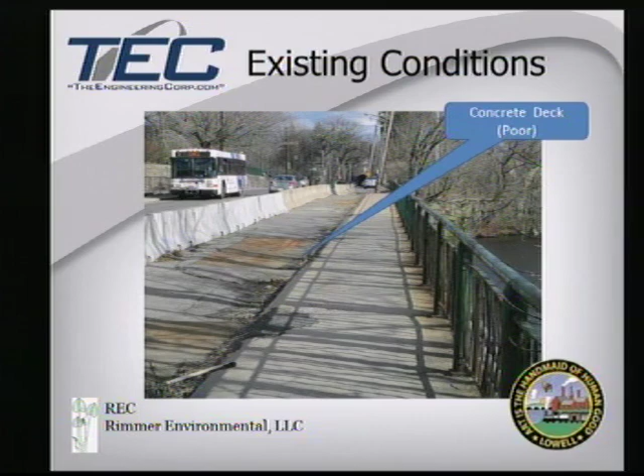Another thing to note: despite the poor condition of the deck, the existing concrete beams at this bridge are in good condition. You may remember we were here back in November to request to do some material testing to see if we could reuse those beams. We went through that, and the results exceeded our expectations - we are going to be able to reuse those beams.

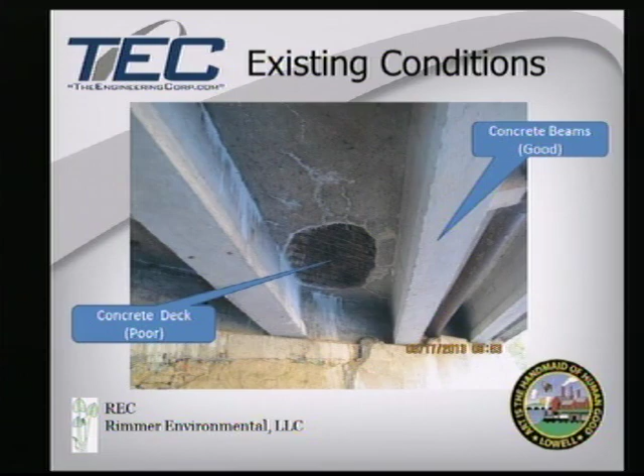Other areas that need attention and repair include some localized substructure repair, concrete spalling at the abutments - at the east abutment and the fifth pier, the easternmost pier along the river - there is some localized undermining and scour that we will also look to address.

We had another subconsultant, Novus Engineering, perform a hydraulic study to determine and evaluate the existing conditions, to determine the appropriate remediation techniques to address the undermining at the east abutment and pier number 5.

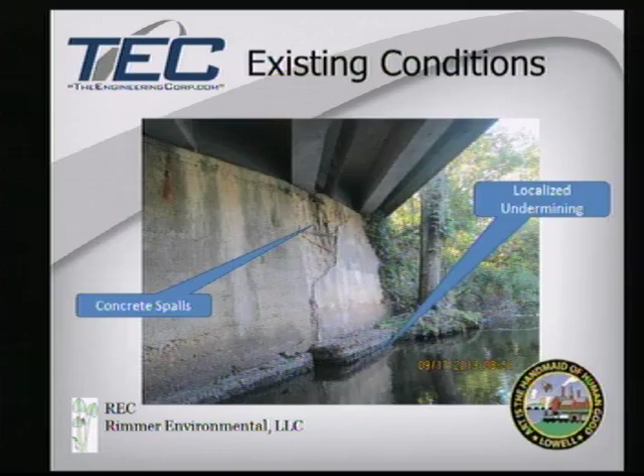So the proposed work - what we plan to do at this bridge - as I mentioned, we plan to keep the existing beams, so we're going to do a complete deck, sidewalk, and railing replacement. We are going to replace that in kind with a high-performance concrete deck, and we are going to replace the railings in kind.

This is adjacent to Lowell Cemetery and the Concord River Greenway, so we've been working with the historic board to get their buy-in and input on how they want to preserve the aesthetic of the Lucy Larcom ornamental rail on the outside. We propose to maintain that look and provide additional vehicular protection by installing an interior vehicular barrier at the face of curb. As mentioned, we would plan to reuse the existing concrete beams.

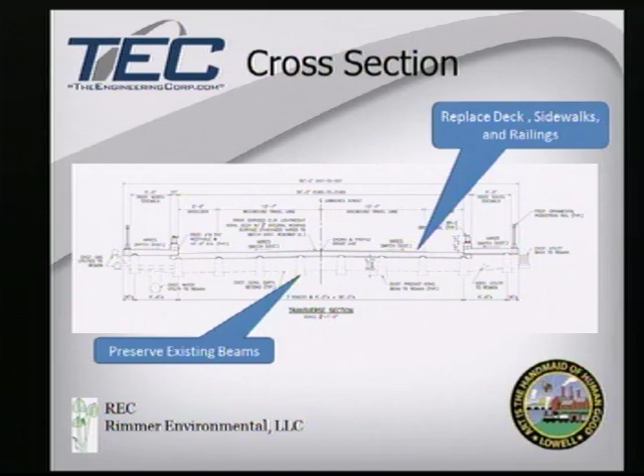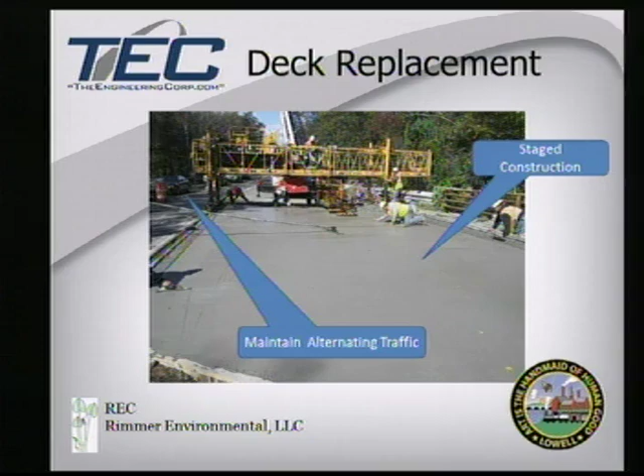The same philosophy is going to occur at this bridge, where we're going to maintain traffic in both directions through a single lane controlled by a temporary traffic signal. That was one of the wishes of the city - because of the location of the bridge and the traffic demand, we couldn't shut the bridge down and rebuild it all at once. We wanted to keep traffic going, so it's being built in phases.

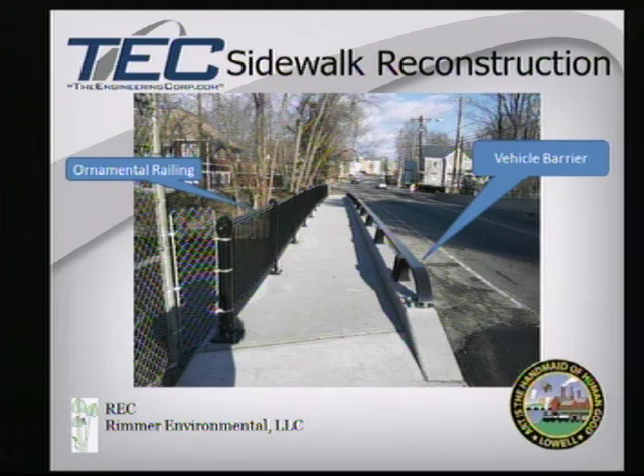This is a sample of a bridge we did in Lowell as well, to give you an appreciation of what we're talking about in terms of construction of an interior vehicular barrier, along with being able to maintain the ornamental rail at the exterior. This is Pawtucket Street over the Pawtucket Canal.

Can I interrupt you for a second? Can you go back a frame, please? If I know how - I can't, my eyes are bad. Does that say previous? There, thanks. Where the arrow points to, in the vehicle barrier - yes, this is not an issue for the Conservation Commission, but it's a design issue, yes.

These are being installed in various bridges throughout the city, and without fail, the plate at the ends where it bends down at the elbow extends out into the roadway surface, where they drill it into the barrier itself. There's a bevel on the concrete side, but the plate extends over the bevel. It's a potential liability issue, because someone could walk by and nick their leg on that sharp piece of metal - if you can pass that along to whomever. Sure. The Central Street Bridge they just did has a similar detail on both sides - four of them are like that.

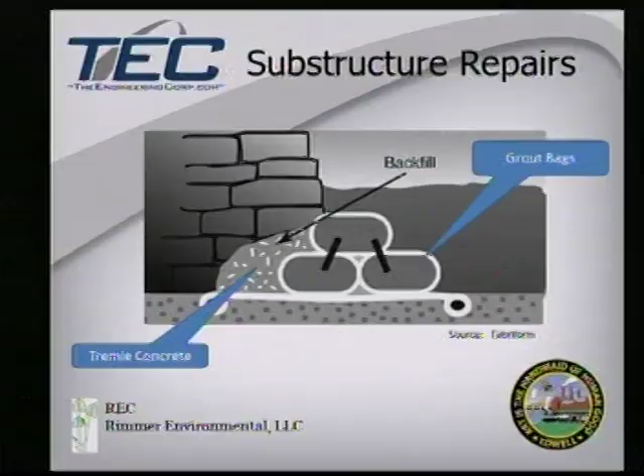This is a typical photo of what's being proposed to address the undermining at the east abutment and at Pier 5. This is a technique Federal Highway uses or promotes for all DOTs to implement for reestablishing substructure integrity. What you see here are grout bags, fabric bags filled with cementitious material that harden up and serve as a stay-in-place form. PVC pipes are inserted through those bags, and grout is pumped into the confined spaces, filling the voids of the undermined area. So this is what we're proposing to do, both at the east abutment and at Pier 5, and that's the extent of the underwater work happening at the bridge.

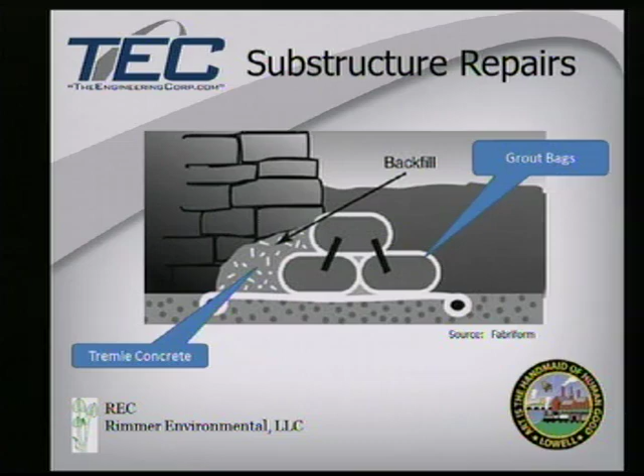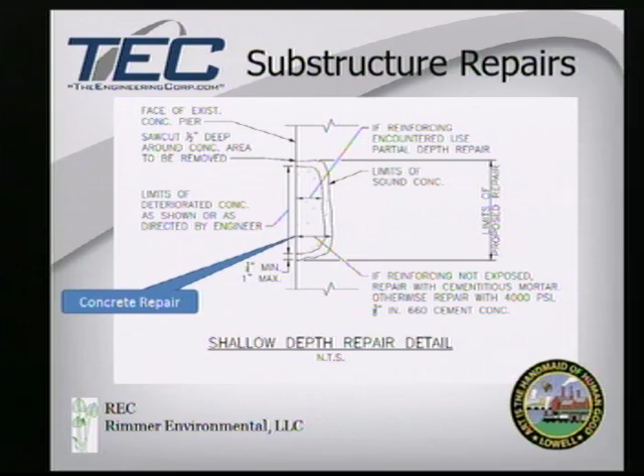Above that, all the other substructure work will follow another typical MassDOT detail for how you would ordinarily address shallow depth concrete spalls or masonry spalls seen at the bridge substructure.

I have a question. In order to get those bags in there, are you going to have to do some sort of cofferdam? Those are actually installed in the wet, usually with divers, to make sure they're properly installed underwater. It's all underwater work, constructed in the wet. So we're not proposing any cofferdam to construct in the dry for these instances.

Is there a certain amount of time those bags need to be in place before you can pour the concrete in? Yeah, you have to allow the grout in the bag to set up properly, and then you can form them to the contouring of the substrate so you get a good seal. So when you pump the tremie concrete into the voids behind it and underneath the abutment, you have a good solid retrofit.

So now to identify some of the resource area impacts from the proposed work: we have bank on the northeast quadrant of the bridge that we have to temporarily impact, and land underwater, as mentioned, for all the substructure work at the east abutment and Pier 5. This is bordering land subject to flooding. The bank at the northeast quadrant will also be used as temporary access for this substructure work, and riverfront area within the 25-foot zone for temporary construction access to get to the river to do the work beneath the bridge deck.

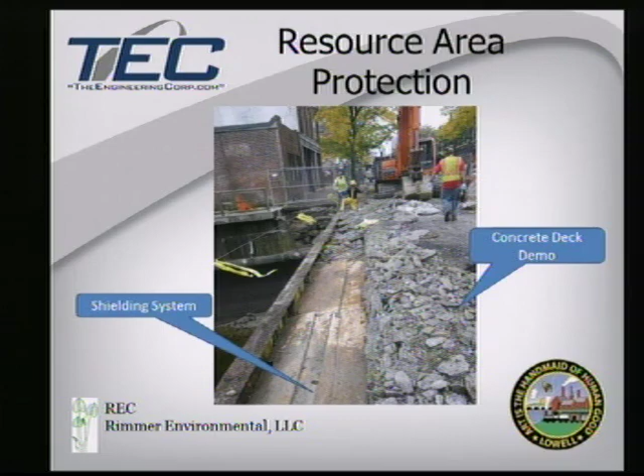Here's some means and methods for getting under the bridge and working under the bridge in the river with some work floats. You see the contractor has small 8x10 or 8x12 work floats that they can work from, and that can also serve as a protective barrier from any concrete or restoration work that's happening from dropping directly into the river.

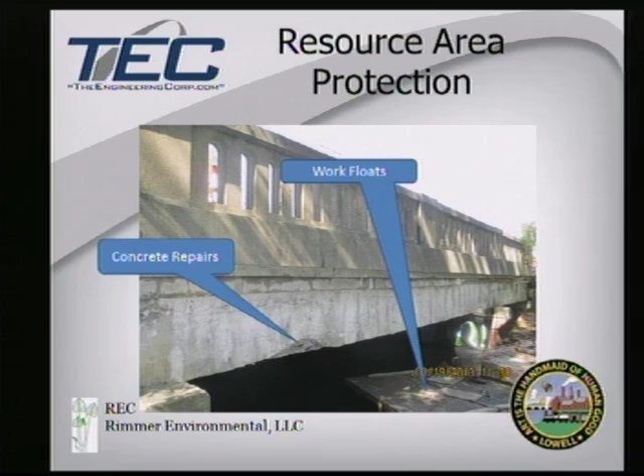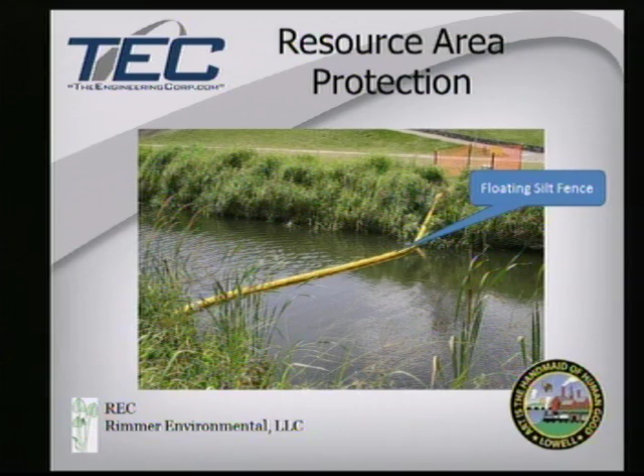So there are a few catch basins down gradient from the project at the intersection of Moore Street. So we would look to install silt sacks in those two locations.

In addition to this presentation, I just wanted to highlight that this is a limited project, a bridge rehab per the Wetlands Protection Act and the local ordinance. We did do a stormwater management report to demonstrate that the existing impervious area is remaining unchanged. Because of the limited project use, there isn't really an opportunity to do any additional BMPs for the project because we are local to the footprint of the bridge for the proposed work. But we did prepare a report per the Wetlands Protection Act and the standards, and it's included with this filing.

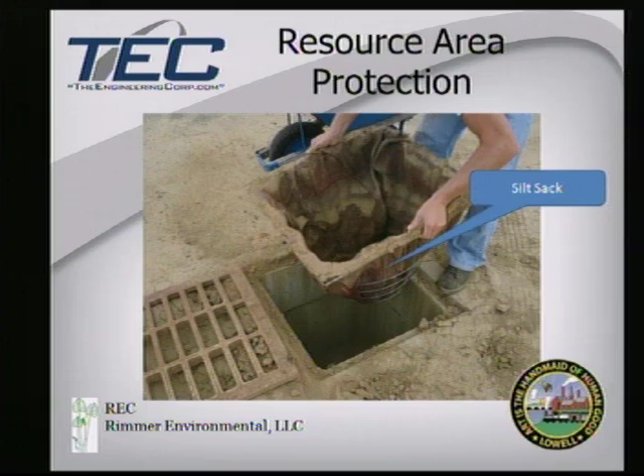So with that, if there's any questions, I'd be more than happy to answer, or anyone else from the design team. Yes, the grout bags, yes.

Do those remain after? Yes. After the grout has been pumped in, or the cement, or whatever it is that you do? They do, yes. And if I didn't mention it, the actual stream bed elevation is being reestablished, as there's been some loss of stream bed material. So those grout bags are there to serve as a permanent form for what we're correcting underneath the abutments, but it's not excessive fill.

My question is more geared towards, do they degrade? Do they solidify? Does anything leak out of them? No, my understanding of the product is once it solidifies it serves as another form of revetment or riprap. It's there to protect the toe of the abutment and prevent any future washout or future undermining.

Now my other two questions are more related to the resource area, your access area, on the other side, both on the South Lowell side of the bridge. For the most part, you have two large caliper trees. Let me go back to that photo.

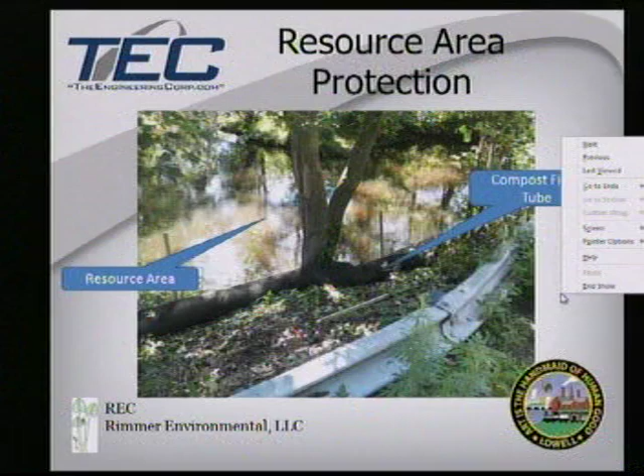Not that, that's a different spot. There, yeah. So this tree right here is one that we don't believe is going to be impacted by the work. The majority of the work is similar to when the contractors did the material sampling at the bridge—it's foot traffic, hand tools. The only thing is, if we were going to deploy the work float, it could be deployed from the road itself. Once we take the lane, we could drop the work float into the resource area. We don't envision large mechanical or heavy equipment going up and down that slope. For that reason, I think that tree can be maintained and preserved.

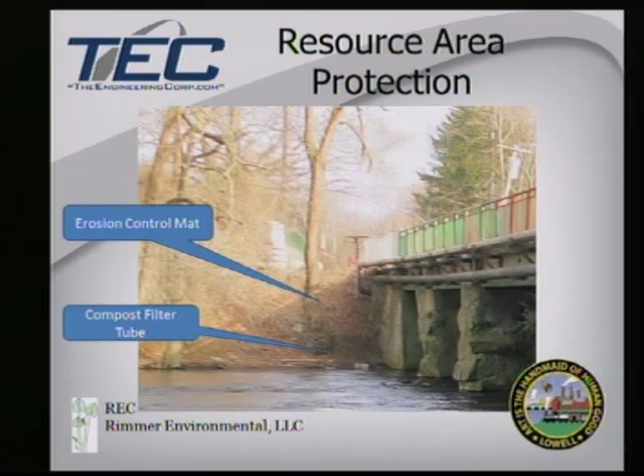That was my question. So you're not anticipating any heavy vehicle traffic that would damage root systems, since that tree is stabilizing that bank? Oh, it's probably absolutely protecting the abutments of the bridge too.

And now on the other side, where the abutments were sort of degraded—oh, let me. That side really isn't accessible. There's the vertical stone wall. You're not planning on impacting that? It would be on the lower right side, where it says handmaid of human good, the little seal there.

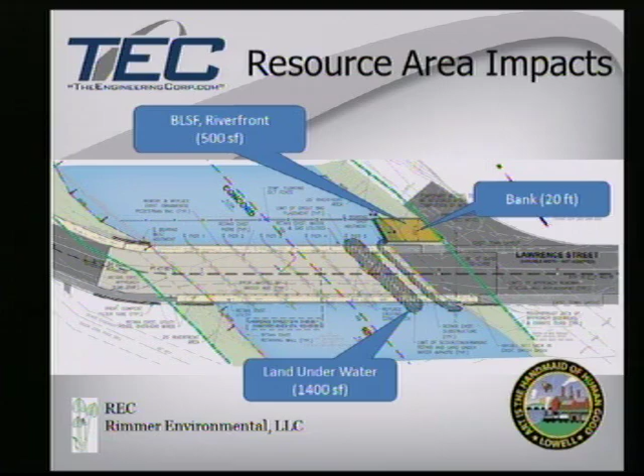That green area there, there's another very large caliper—I think it's a red maple. The only access area to get to the river is what's being shown, so that wouldn't be impacted either. No, okay. All right, what are the plans after that access area, once you're done, to restabilize that bank?

We would plan to use a restoration seed mix that MassDOT would ordinarily spec out for their state projects. This has to go through a MassDOT Chapter 85 review as part of this, so we tend to want to implement as much of the standard details and standard specifications, and any offerings that the commission would also have, as far as what that restoration mix would comprise of. We'd be very interested in doing that.

Mary's reminding me that, to protect that during construction, there would be a straw mat to help protect that from any large erosion or washout or what have you. All right, I have no further questions.

Commissioner Varnum? No, I have no questions.

Commissioner Lovely, just a quick one: how long do you expect it to take before those bags cure, and are you pretty confident that the scouring that's occurred in the past has been addressed and it won't happen again?

Yes, when we had our subconsultant do the hydraulic study, they gave us several alternatives, all of which would work. And this one is a proven practice; as long as it's properly installed and toed in, it prevents any future undermining from occurring.

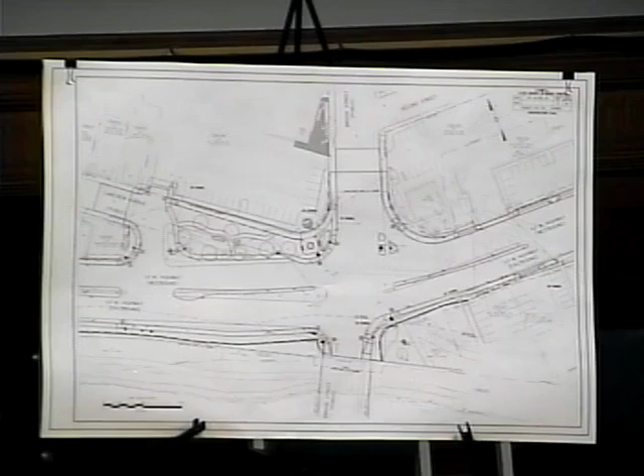I have brought, to address the items that were outlined on the comments that we received, a cross-section of the low point. There was a comment about the land subject to flooding. The low point at this location is approximately the intersection with Lakeview Ave, where the turn is, not where it comes up to the Bridge Street and VFW Highway. I'll point to it.

I have the profile that I can show you that, for the most part in this area, as you know, it's pretty densely developed. So we have to meet existing pretty much right at the back of sidewalk, because that's where the houses and businesses are. So the profile on the cross-section changes very little through here. It's mostly a reconfiguration of the islands, as you can see, and reconfiguration of the lanes and some minor widening, as well as the ADA upgrades.

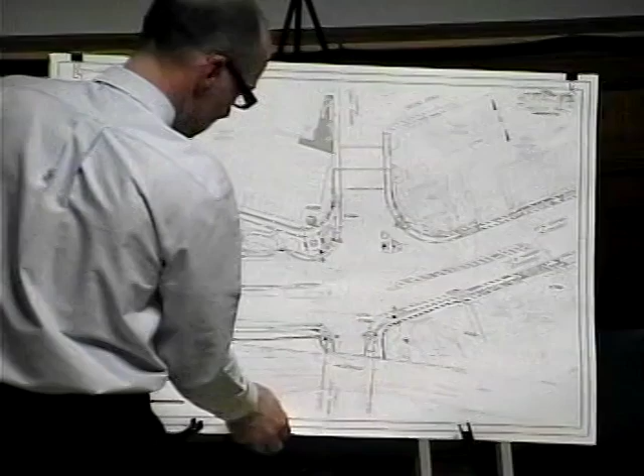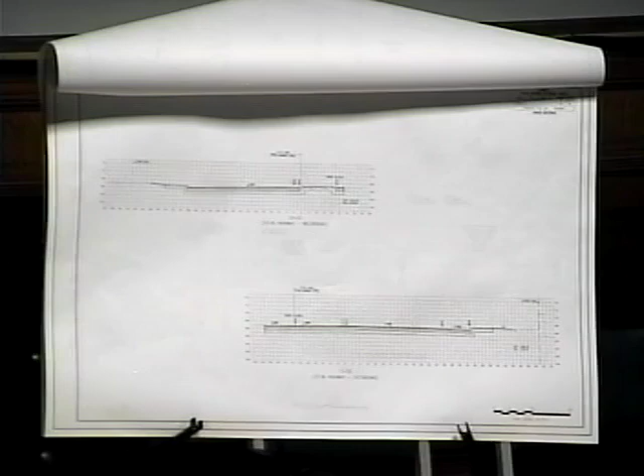So I'll switch over to the profile on the cross-section. This cross-section, I don't think you had it as part of your submittal, you just had the 3 plan sheets. This cross-section is approximately at the location of the Lakeview intersection, and it's hard to see from this distance, but there's a balance of cutting and filling, and it's very, very minor in this area.

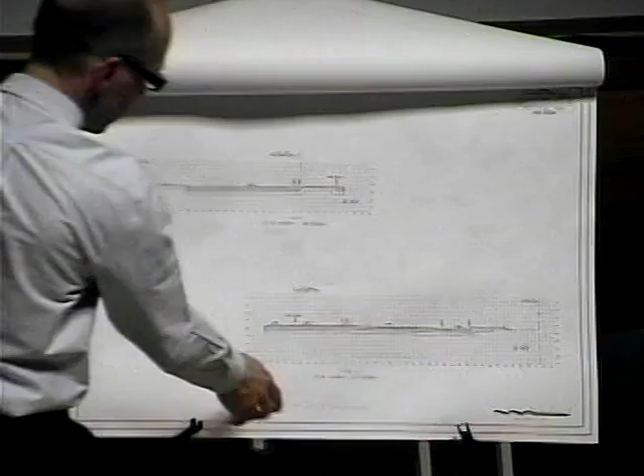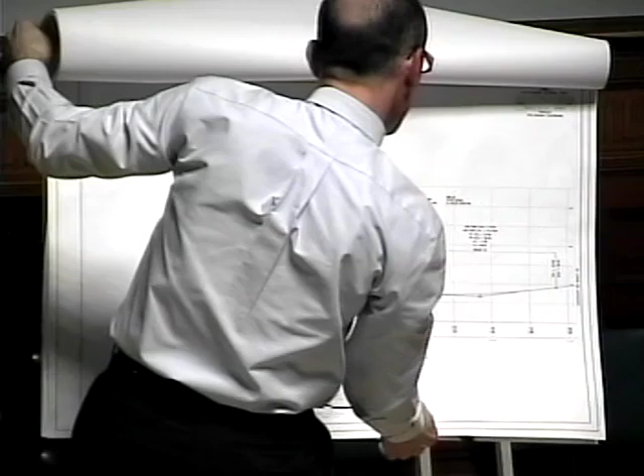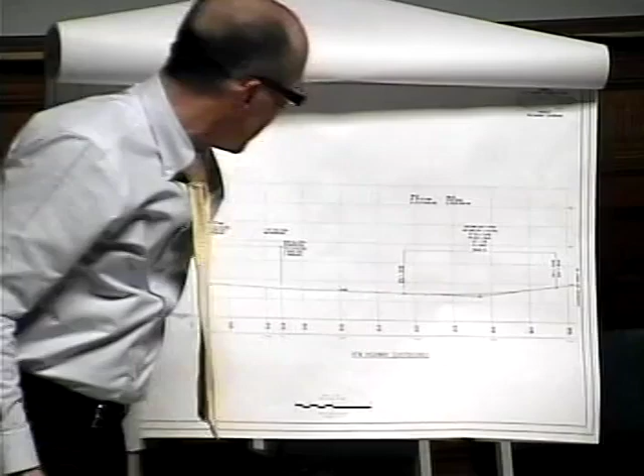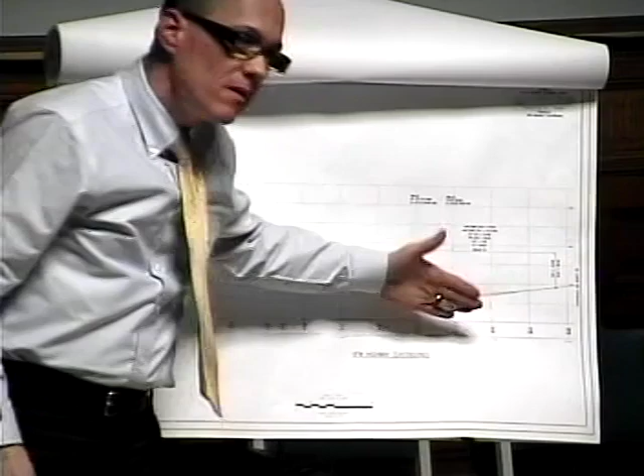And then the profiles on the next page. This is the low point here, and this is approximately the intersection with Lakeview Ave. This dashed line is actually the existing roadway, the existing pavement where it is now. The proposed is slightly above, but this is only showing it one slice through the roadway. If you look at the cross-section, you can see that it's balanced.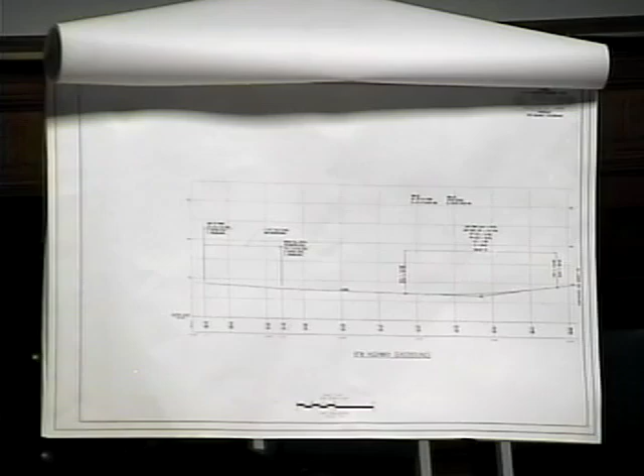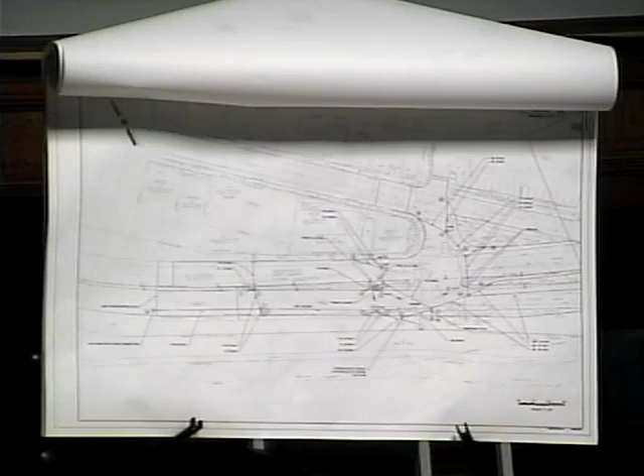And I'll switch over to the drainage plans by Mass DOT. Basically, it's just a reconfiguring of the existing system, or to tie into the existing system, and then at a later date, they'll be doing the CSO separation. At this point, I can ask any questions.

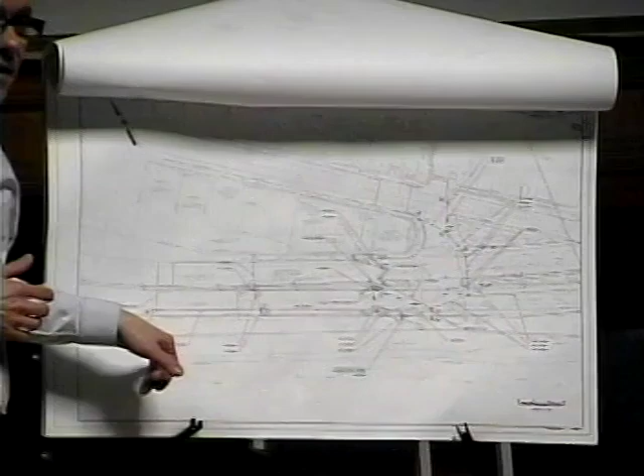Either on the river side of the area here, there's a sidewalk that runs along there, and that's sort of the inland part of that levee. Is there any change in elevations to that particular area? So on the river side of the actual levee, is that what you're asking? Not on the river side, it's actually along the sidewalk, adjacent to the roadway, adjacent to the VFW highway. That's sort of the inland end of the levee, so to speak. Are you talking about the path? No, there's the sidewalk that runs right along the road. There's a 4-foot sidewalk, and then there's a very small grassy area, and then there's a fence, chain link fence, and then it goes down the bank to the Riverwalk.

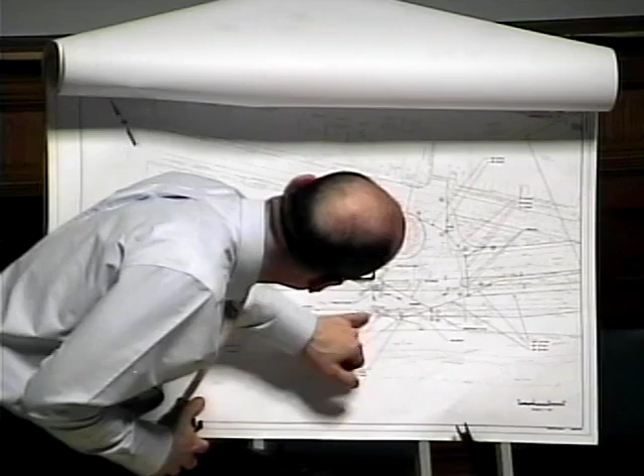Are you proposing any regrades along the sidewalk adjacent to the VFW itself? There is not, though there's slight grading that ties in at the back of sidewalk. Towards the intersection with Lakeview, the sidewalk does actually approach closer to the levee in that location.

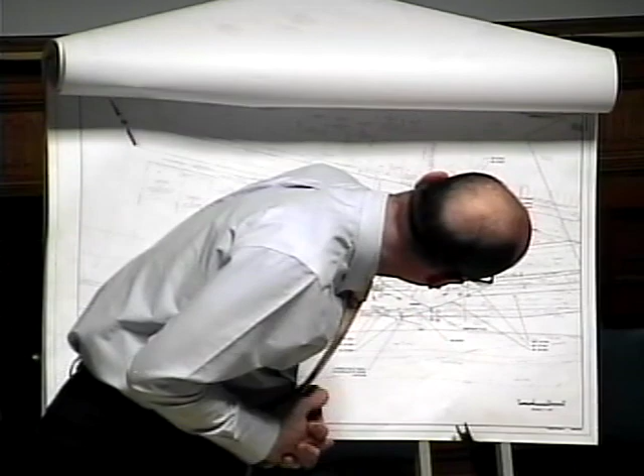That area functions as a levee. During the Mother's Day flood a couple years ago, the water level in the Merrimack was higher than the road surface along the VFW in that area. The levee was interesting to see. I read the report a little while ago, and my understanding is there are issues with integrity further down, though I can't remember how old the report was.

What exactly are the changes you're making to that Bridge Street, VFW, Lakeview interchange? What are the changes as far as signaling goes, islands, access points, and stuff like that?

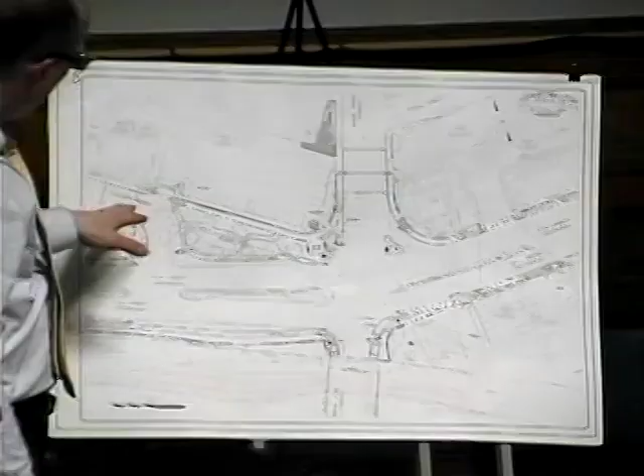The intersection with Lakeview right now comes in at an angle to the right. That intersection is going to be discontinued and turned into a park. The VFW doesn't come in directly either—it goes outbound at an angle, while the inbound is one way.

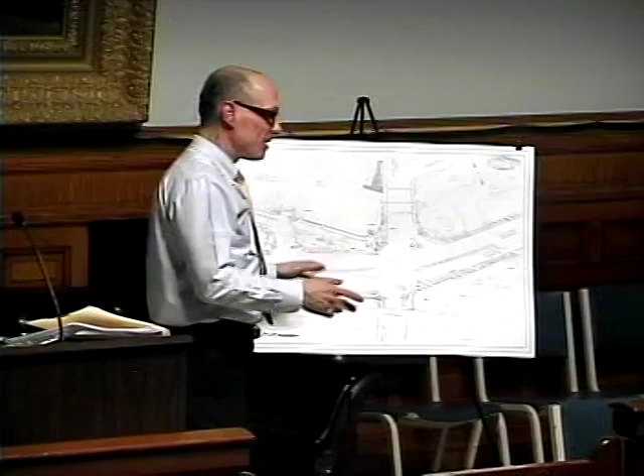I think it is, maybe I'm wrong, but I attended Lowell, and they were redoing this intersection back in '87. So this whole area—I don't know if it's been changed between now and then, but that's my memory of it anyway.

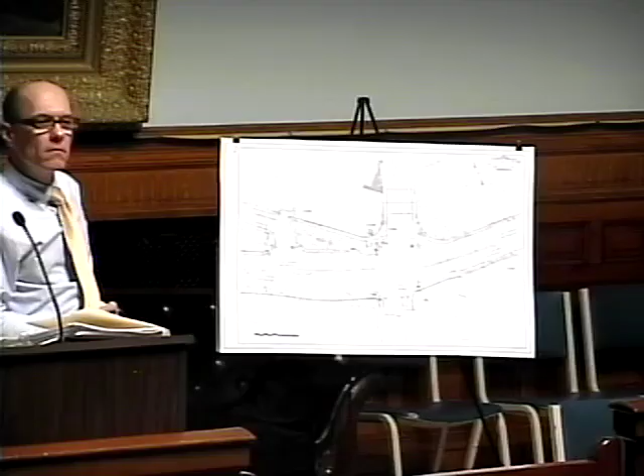So basically, this section of roadway is going to be discontinued, and the traffic will come to a T intersection here. They're going to get rid of one of the traffic lights—there's currently one at the intersection of Bridge Street and VFW Highway, and another just behind that towards the CVS, to accommodate the traffic.

That's to accommodate the end of Lakeview Ave. So is the intent there to remove that traffic light and have more of a continuous flow? Because right now it's almost like a dead space between the two lights—you make it to the light accommodating Lakeview, hit a red light, stop, and then hit the next one right at Bridge Street.

That's correct, that light is going to be removed and consolidated with the lights here—it'll be one light for that connection. But there'll still be a light at the end of Lakeview Ave, correct? Absolutely, that light will still be there, and it's going to be coordinated with the whole intersection.

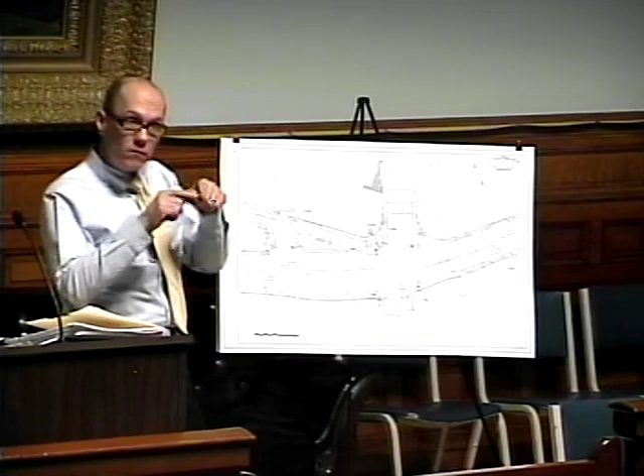And your plan shows the arrows—if you see the arrowheads, those are the light heads on the plan in your packet.

Where's the CSO outfall out there? Right now there's an existing combined sewer overflow, so there's no separate sanitation and sewer—stormwater ties into this sanitary line. They're proposing to tie into the existing system. My guess is what they'll eventually propose is to separate stormwater and sanitation, as that's the requirement, but in the meantime that's a project for the future.

While we're waiting for that separation to happen, will the reconfiguration add any additional stormwater flow into the existing structures that tie into that system? We are not—there's no net increase in impervious area here. In fact, we're actually reducing it because we're removing the Lakeview Ave roadway pavement, and it's becoming a park, so that'll be pervious now.

But I'm thinking about sheet flow off the existing road structures into the storm drains. Once it's on the pavement it goes pretty quick, so the net impervious area will be reduced as part of this project overall.

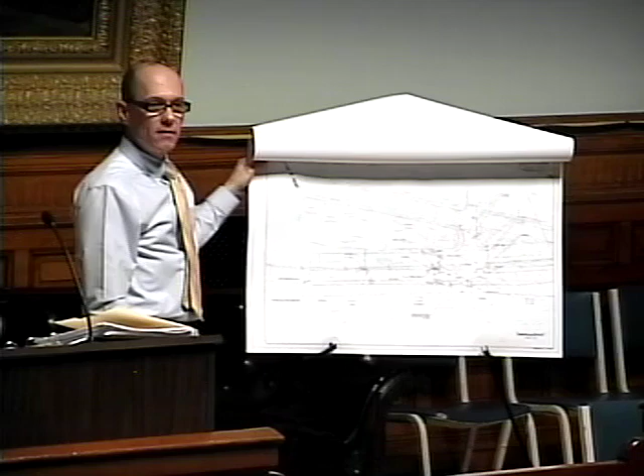Wait, do we know if this area even is combined? It is combined, Lisa. Okay. Because there's drain and sewer, but it's combined—they go in the same place. Okay.

This is kind of out of our jurisdiction, but what's the monument going to be? Is there already a monument there? It's going to be the relocated VFW monument. I believe it's right on the island now. Oh, that monument out there. Okay, gotcha. It's going to be relocated to that position there.

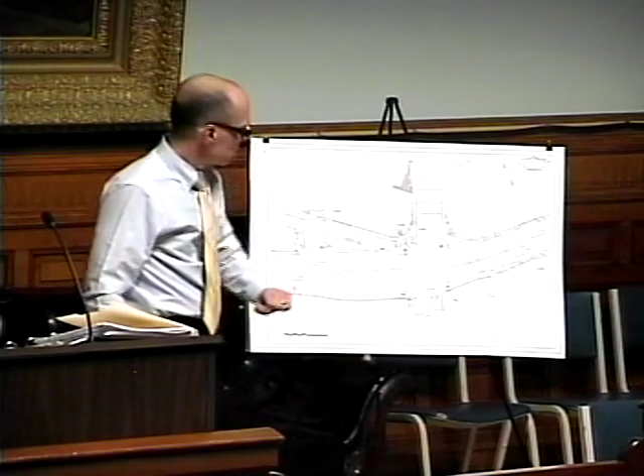CVS must be happy. Yeah.

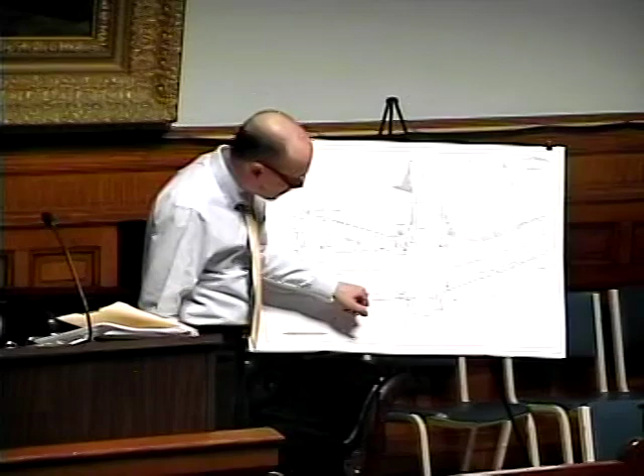Is there going to be, towards the intersection with Bridge Street on the riverside, any widening of the road surface? On this side, yes, right in this area there is a bit of widening. That was required to accommodate bicycle accommodations in this location. In fact, we had to change the design specifically for that reason. We had asked for a design exception, and it was rejected, so we had to redesign to add a little more lane shifting and extra space for the bicycles.

But it's pretty much going to remain two lanes inbound and outbound? With the exception of turn lanes. I don't have the line striping here, but they're going to add a third turn lane. I believe here there's going to be a turn lane, and here there's going to be a turn lane, and then it'll be two through.

Okay. You had indicated that your cuts and fills had basically balanced out. Yes, and that's at same elevations? That's correct. Because I didn't see any calculations in your submittal. I can give them to you if you need them. Yes, okay, please.